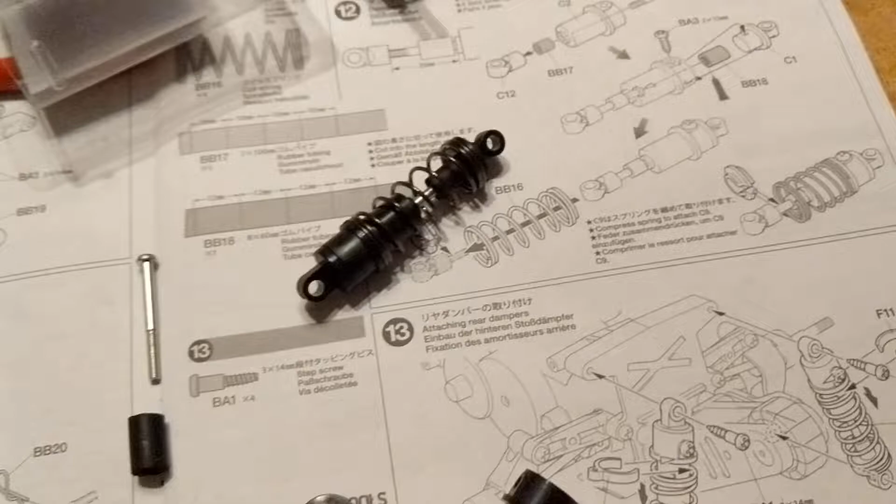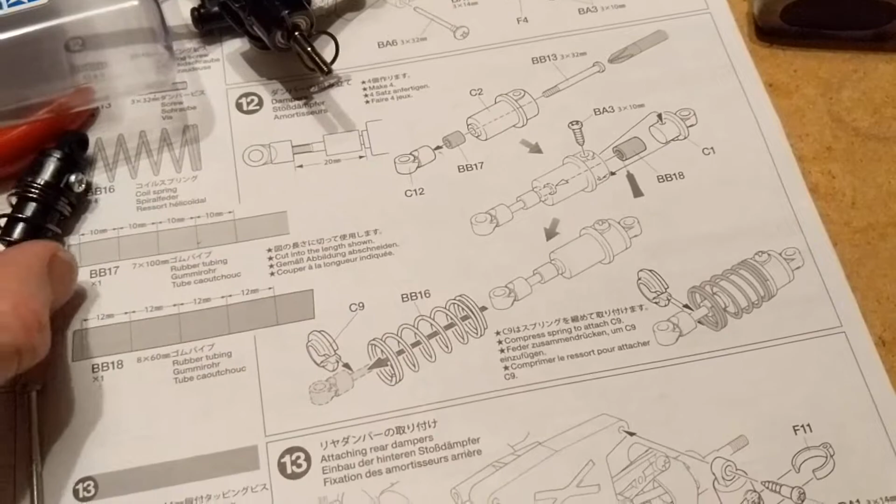Right, I just thought I'd do a short video on the shocks, seeing as now I've built one and I kind of understand how they work with the rubber inserts. So you can see here I've part built one, and the space inside is all hollow.

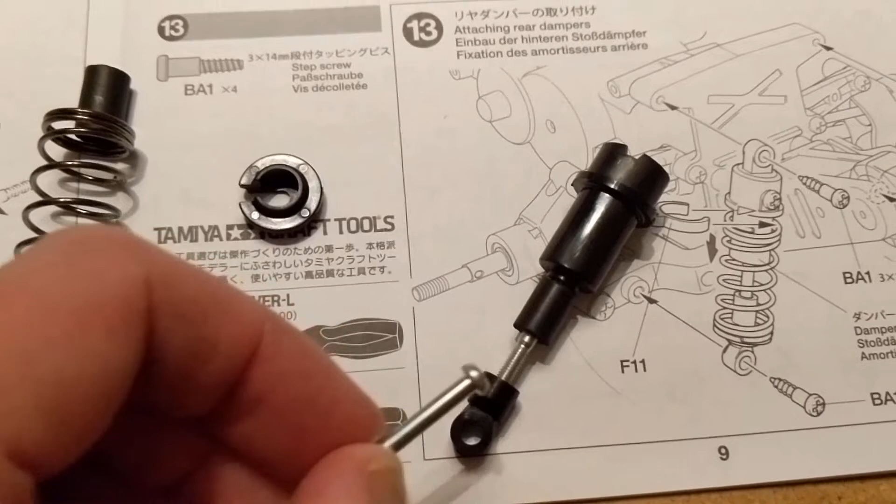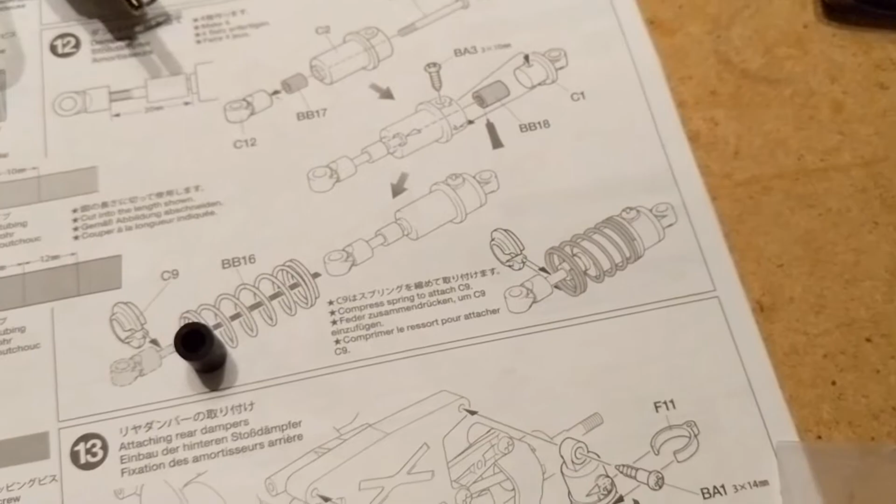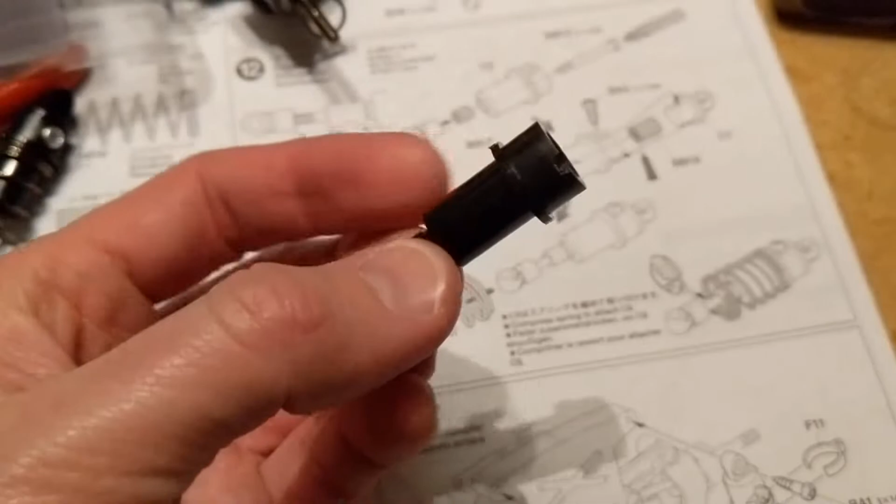The little metal rod here is this thing here, and the other bit of rubber, because you put two bits of rubber in them, that goes inside and you grease it up. It's that, which the metal rod, once it's inside the cylinder, slides up and down inside this bigger bit of rubber, and that's what provides the resistance.

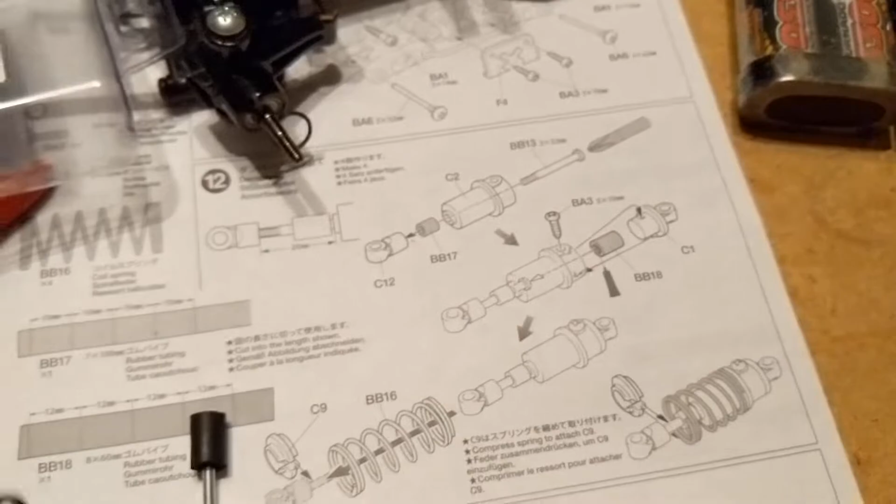And then the spring goes on the outside and kind of pushes back. So that is how they work. It's not the rubber compressing, it's friction of the metal rod inside the rubber tubing. That is how these coil rubber shocks work.

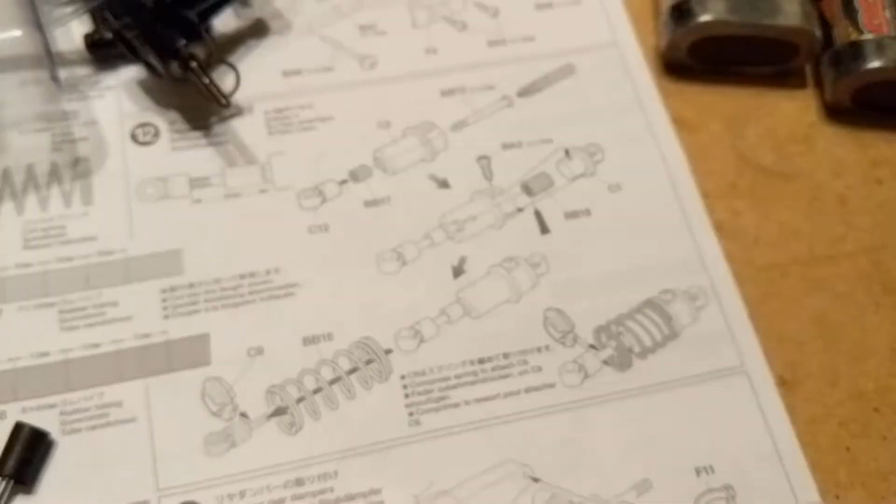Right, so all four shocks are now built and mounted. That's the rear, that's the front. You make four identical ones.

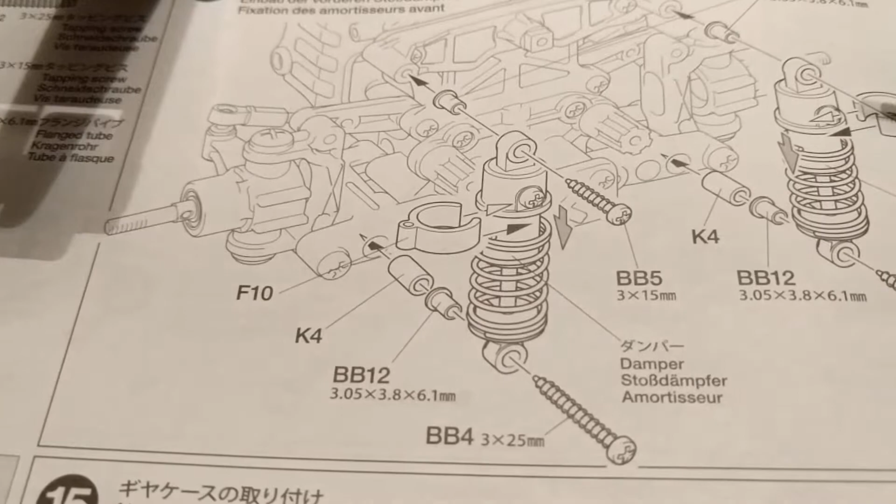Yeah, and they feel pretty good on there. There are some spacers just here that you put on, slightly thicker spacers, for the ones mounted on the front compared to the rear. I guess that makes the springs compress a bit more, makes them rebound a bit more. Maybe you'd expect the front to bounce around a bit more, so that's how they work.

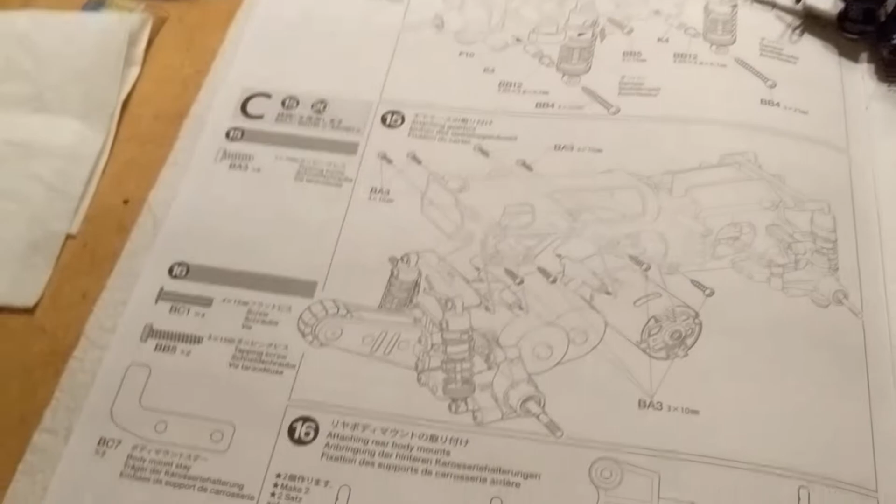The car is still in two bits, but we now move on to step 15 in the C parts bag, which I have here and I'm going to unpack into my little box next. But it looks like the very first thing we do in steps 15 to 20 is to mount these two bits together to make the chassis.

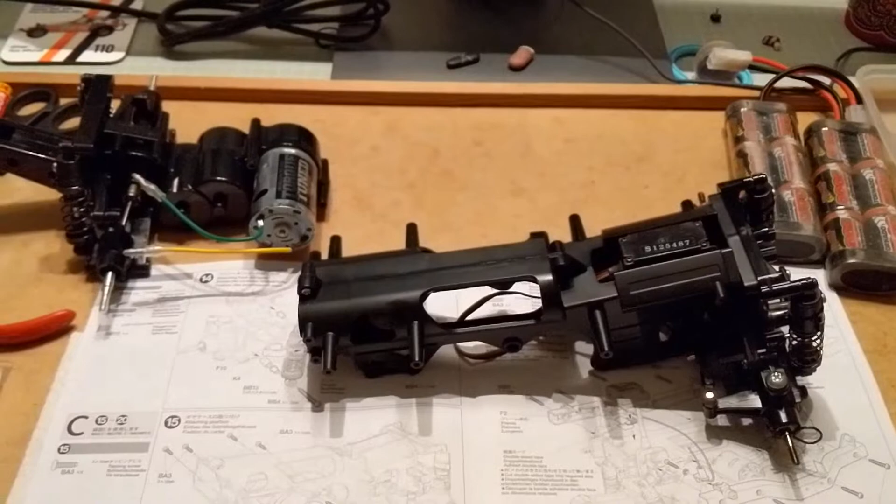Right, C parts bag is unpacked. So this is the kind of stuff that you get in it. There's actually two bags in the C parts bag, one for steps 15 to 20, one for steps 21 to 26. 21 to 26 is for the body metal parts bag.

So let's have a look over here. There's this big strip of metal. Never seen anything like this before on a Tamiya model. It might be the spoiler, I think. So there's that. I haven't unpacked all the little bits and pieces because some of the ones in here are absolutely tiny.

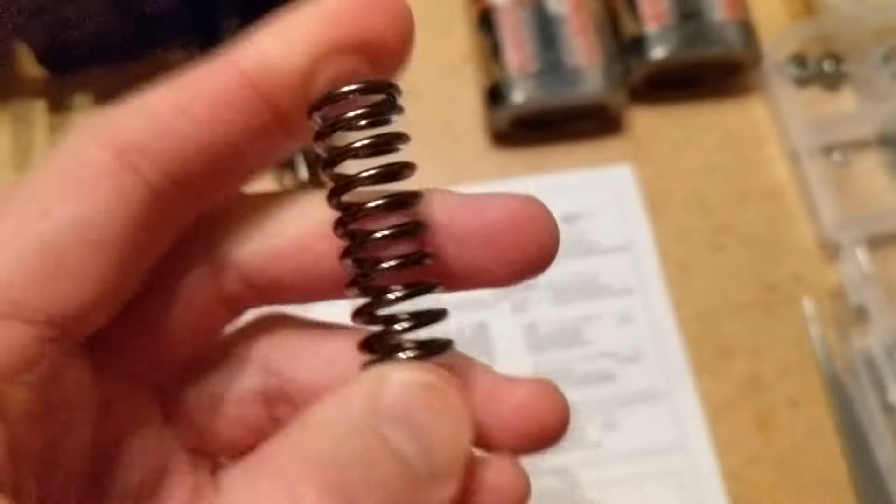So most of these are for steps 15 to 20. All pretty standard stuff. This is like a big hunk of metal as well. Not sure what that is, we'll get to that. Some very stiff, chunky springs - a lot thicker and chunkier than the shock springs. These will be for the front bumper, I suspect.

Some other funky big metal bits. Rubber mount, double-sided tape, some cable ties - they'll be the body mounts. So yeah, all good, and we'll get on and crack on with this final part of the build.